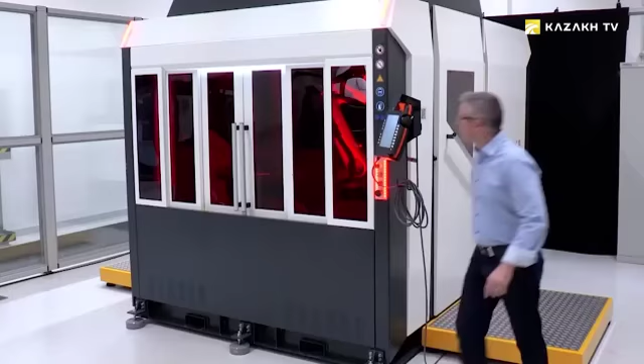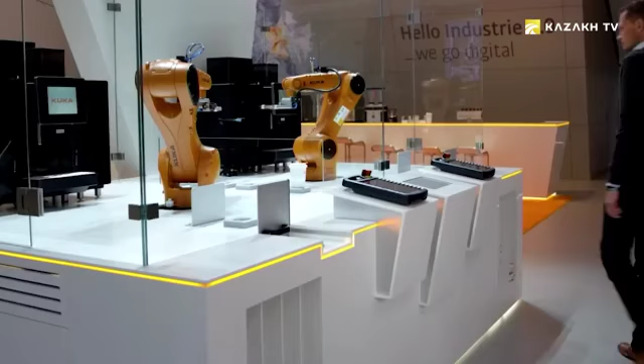The term Industry 4.0 came into common use in Kazakhstan in 2017 when the head of state announced the need to digitize industry. Automation of production is an inevitable process at each industrial enterprise.

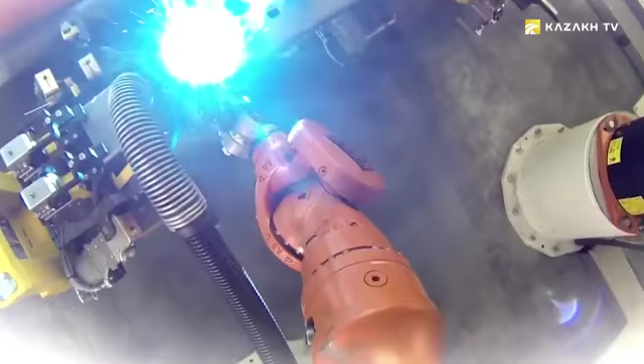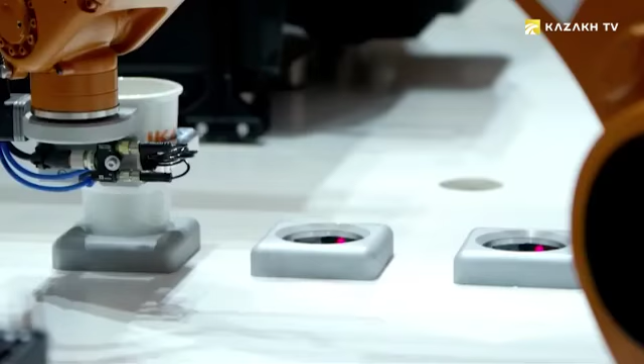Eventually, they come to the realization that harmful, heavy, or simply complicated manual labor can be replaced by artificial intelligence. The basic principle of Industry 4.0 is the symbiosis of machines and humans, the use of cyber-physical systems in production. For this, the algorithms of neural networks are used, which appeared in the 1980s but could not be used as effectively as now due to insufficient computing power.

What is a neural network? It is a trained algorithm based on historical data. When we add to this the knowledge of a person, an expert on the process, we get a management accuracy of about 95%. This is data from an international consulting firm.

The accuracy of machines is 80% when managing a process. The accuracy of a person can be up to 70%. But a person also depends on experience, service record, and mood varies. Moreover, when you combine a person and a machine, you get 95% accuracy.

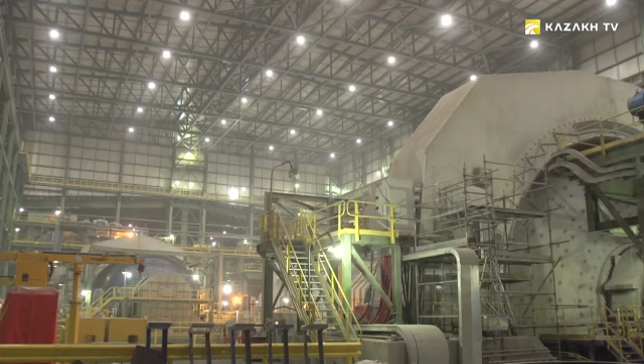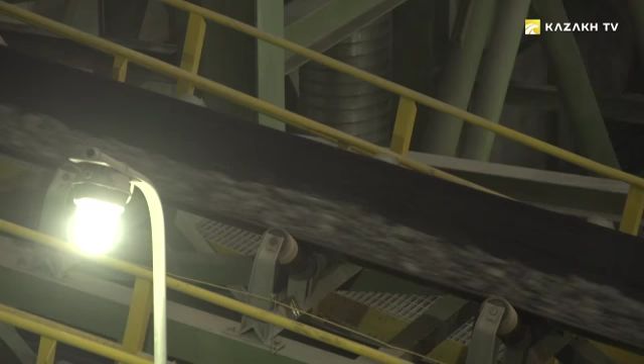Despite the efforts of the state and business to move away from the raw materials economy, the mining sector still remains the basis of Kazakhstan. These are companies competing on a global level with complex business processes. They existed on the territory of the country before independence. Nevertheless, it was these enterprises that turned out to be best prepared for the fourth industrial revolution and the introduction of digital control principles.

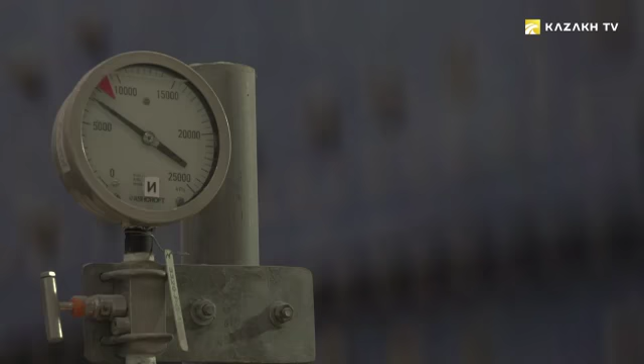It can be said that today mining enterprises are more ready for digitalization than, let's say, manufacturing enterprises. Today we already see that, for example, 6 of our systemic companies, ERG, ArcelorMittal, Kazzinc, Kazakhmys, and others are already implementing 14 projects until 2025. And we expect that these projects will provide an economic effect of about 240 billion tenge to gross value added.

It was necessary to begin the work on digitalization of industry with a collection of information and analysis of the current situation. Therefore, representatives of the Kazakh Institute for the Development of Industry, together with the German Fraunhofer Institute, studied more than 600 Kazakh enterprises.

The results of this work showed that more than half of mining companies are at the level of semi-automated production. Seven of them became model factories where smart mines are now created using geolocation and other digital solutions.

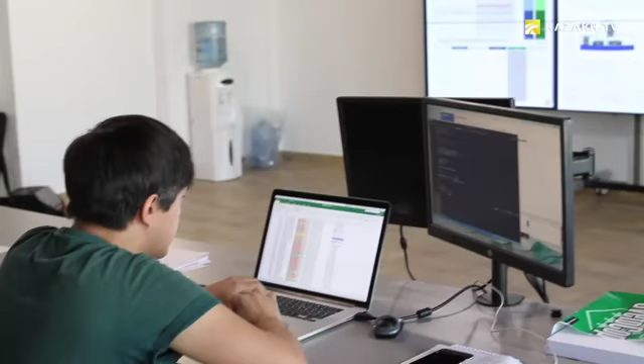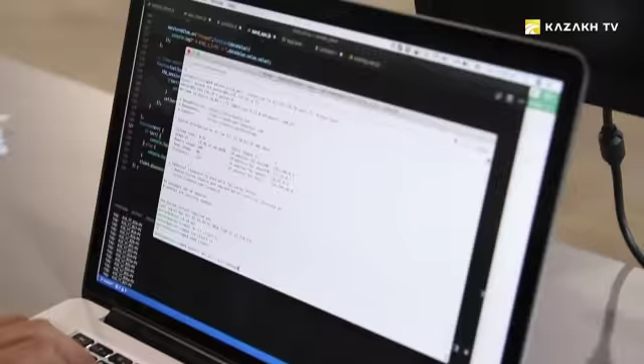One of these domestic developers is the Technology Development Center, created on the basis of the Innovative Technology Park together with British colleagues. Here they are engaged in the creation and implementation of information technologies at the mining enterprises of Kazakhstan. Laboratory algorithms are based on artificial intelligence and machine learning.

Big data is collected directly from production, sensors, laboratory systems, and manual input, in order to first build a digital process model. This is a kind of digital equipment twin and digital model of how the process takes place. Based on this, we can predict further what will happen in the process.

Based on a forecast given by a neural network, for example, we can make recommendations to the operator in real time.

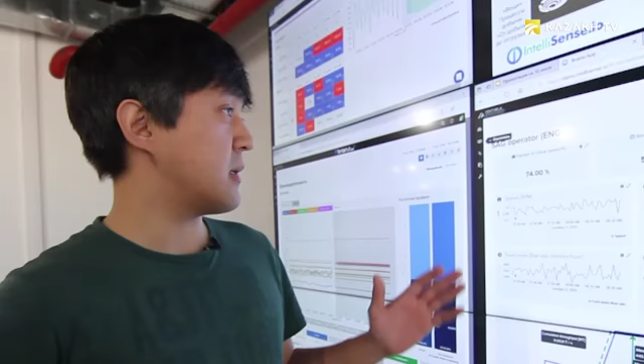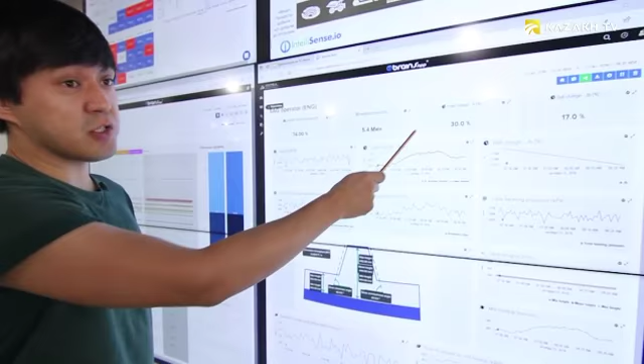Here is the operator's screen, which displays the main indicators of the crushing process: the time of material passage, and the percentage of balls loading. You can also see the red line on the lower screen, which is what we predict 10 minutes ahead, while the blue one shows the indicators which happen in reality.

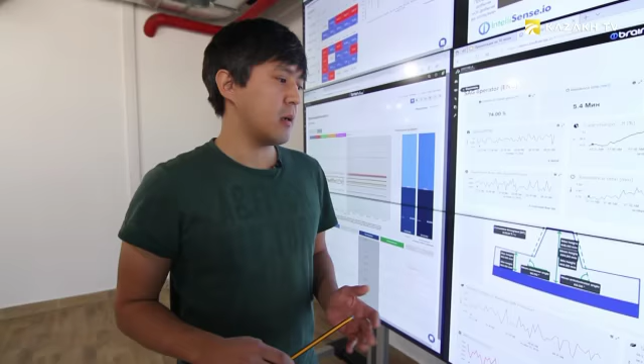We get real-time data from sensors, transfer it to the cloud, process it, and send the results back.

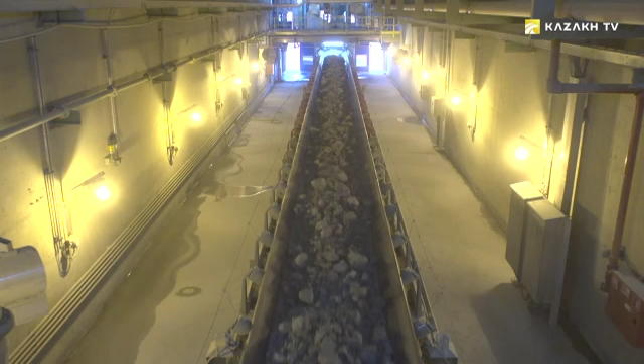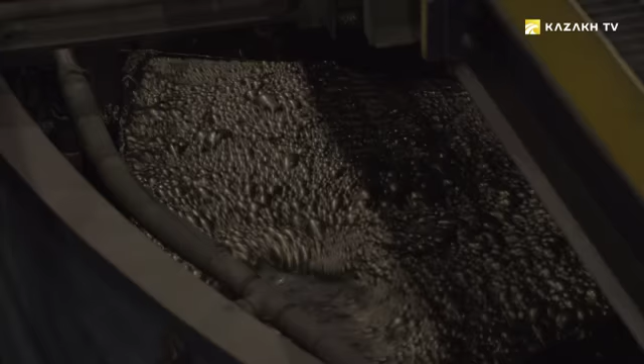The speed and efficiency of the introduction of such technologies depend on the level of technical equipment of the enterprise. The availability of the necessary sensors, IT infrastructure, or even communications and internet at the mines determines how quickly it will be possible to combine all the data and use them to improve production processes.

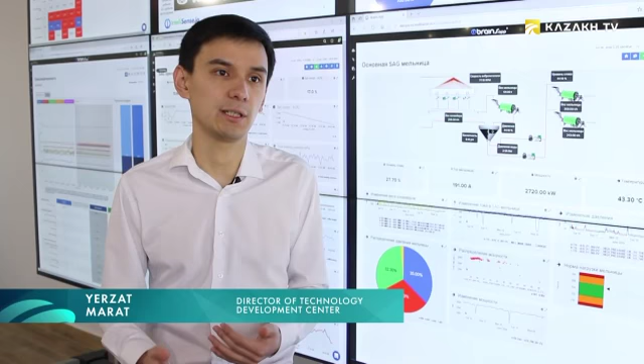With the help of many achievements in machine vision, many tasks can be solved in the context of safety. For example, occupational safety can be solved in cheaper ways than this could have been done before.

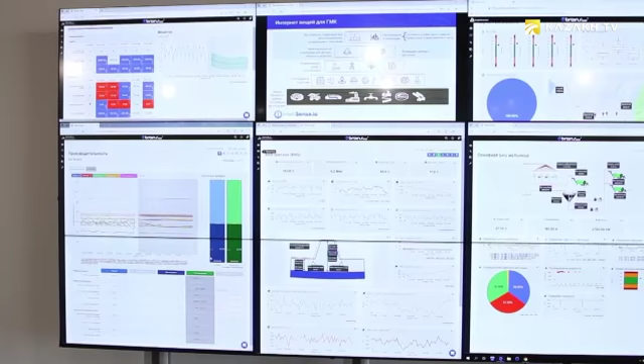These data are delivered from gold deposits in Zhambyl and Karaganda regions, where one of the largest Kazakh enterprises operates a mining site. Digital Mine pilot project was launched here in conjunction with government agencies. The gold mining giant uses cloud solutions for business process management, developed and supported by experts in Almaty.

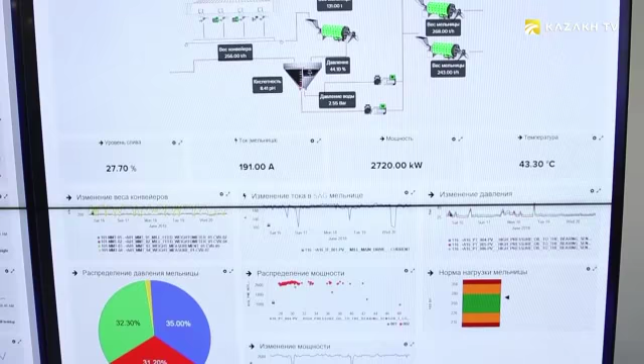According to the Digital Mine project, the system architecture is built today. There is an understanding of which vendors, systems, and for what purposes we will use throughout the entire cycle of business processes of the company, beginning with geology, open and underground mining, dispatch to the integration platform through which we will receive financial reports and financial data from the ERP system.

In addition, the plans of the Technology Development Center include the introduction of the Industry 4.0 platform in other industries, as well as the involvement of domestic developers to create startups based on the platform already created.

In Kazakhstan, 80% of GDP comes from engineering, energy, logistics, the mining and metallurgical complex, and oil and gas. Therefore, here is the platform that we use to optimize processes in the mining and metallurgical complex. We want to make it available for Kazakh developers and startups, and also for end customers in the industry, in order to get the effects of digitalization. Then everyone will be the winner.

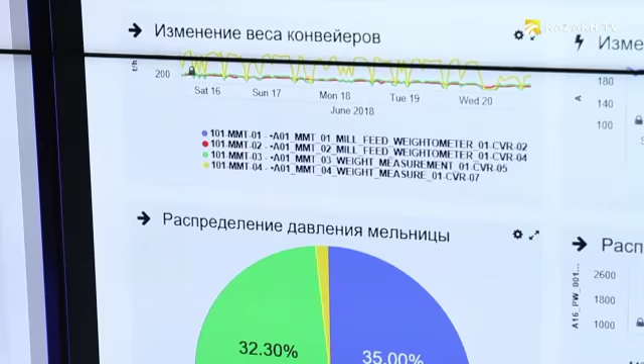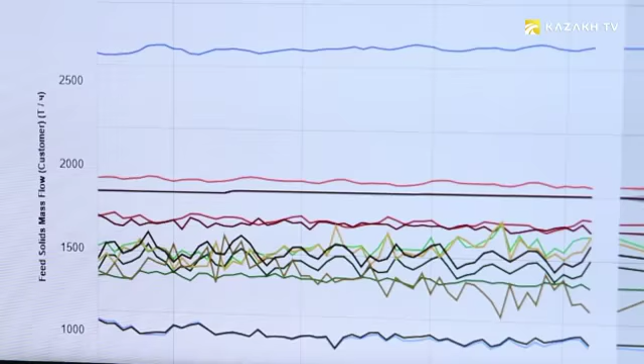IT specialists will receive new tasks, and enterprises will be able to quickly adopt the principles of innovative management. Artificial intelligence allows solving many problems using less expensive methods, so they are a profitable investment item.

Return on investment is good. For example, we try to optimize processes that give a return on investment during the year, that is, up to 12 months. If we're talking about a more comprehensive project, with the introduction of hardware and software, then the effects can stretch by 2-3 years there. But it also depends on the investor, the enterprise, the management of the enterprise, and what horizons they look at.

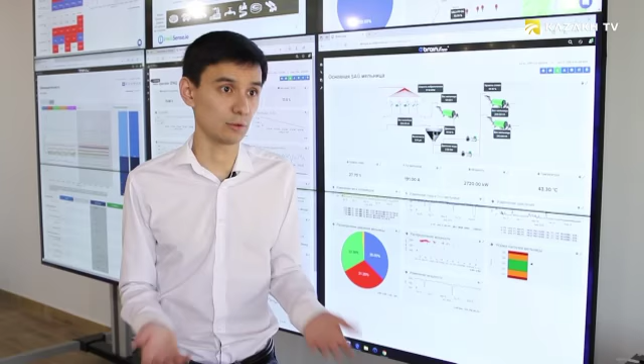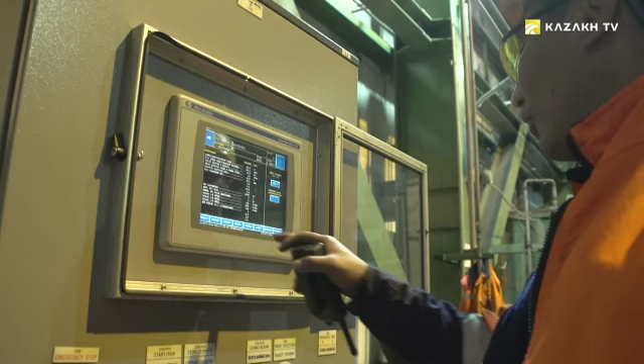One of the leaders in the introduction of digital technologies is a domestic enterprise of the mining and metallurgical complex. Here, all working processes, from ore mining to concentrate production, are automated to different extents.

I can tell you with confidence that the human factor is excluded here by almost 90%. If we go to the processing complex, we will not see almost anyone because all management takes place in the display console where the operator is working.

Up to 100,000 tons of ore is mined in this quarry per day. Each material must be classified and delivered according to its destination. For this, geolocation data are used.

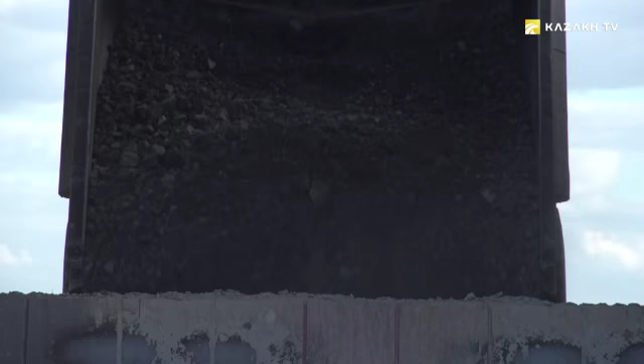Per day, 21 dump trucks make 1,800 travels. This is a very large amount. That is, earlier people had to record every travel, and there was no such system, so the human factor occurred and 1 to 2 percent went to the wrong destination. The number of incorrect travels could increase to 10,000 per year.

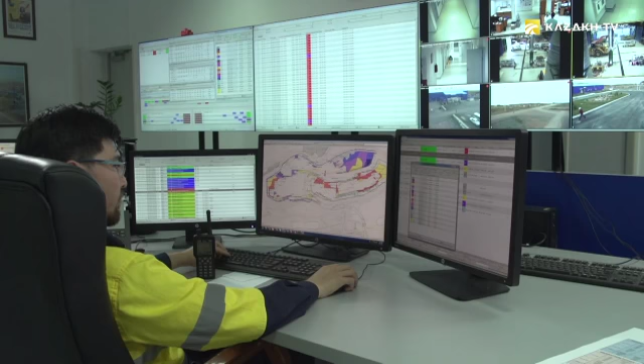Now we do not have such a problem because the Leica system automatically determines the type of material and its destination, whether it is some kind of ore stockpile, a sulfide, or a clay factory. This system includes not only ore classification but also the automation of the drilling and blasting schedule, and the distribution and route of mining equipment. Monitoring is also carried out at subsequent stages.

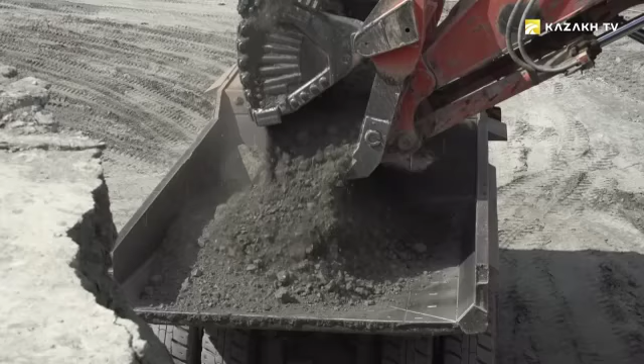Our main conveyor is completely equipped with belt drift sensors. Emergency cables and belt breaks are displayed here on my computer. I can see where the belt drift has occurred, or even if an emergency cable is pulled.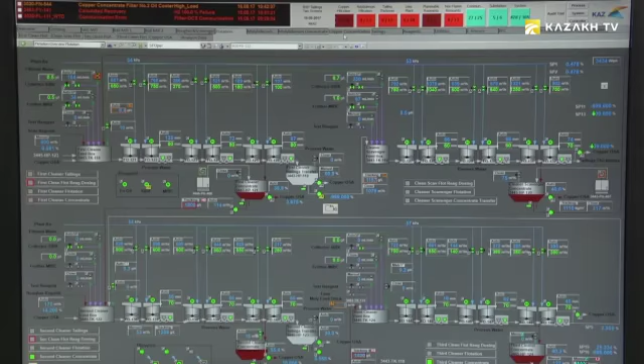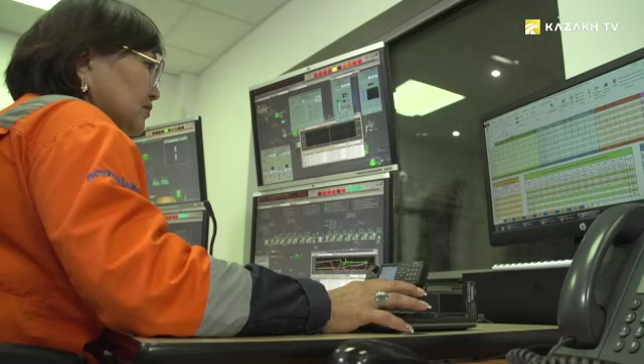The use of automatic control made it possible to increase the productivity of the quarry by 20%. All production processes are monitored from this room. It is the main control console where data from all sensors and information from all operators flow.

At the construction stage of our facility, over about 2 years, our management system was created by automation engineers, which you can see on the screens here. From here you can manage all the technological processes, starting from supplying the factory with water, which comes from Shidir village, about 100 kilometers from the factory - we can manage the pumps remotely - and ending with the final process, which is concentrate filtration of our final product.

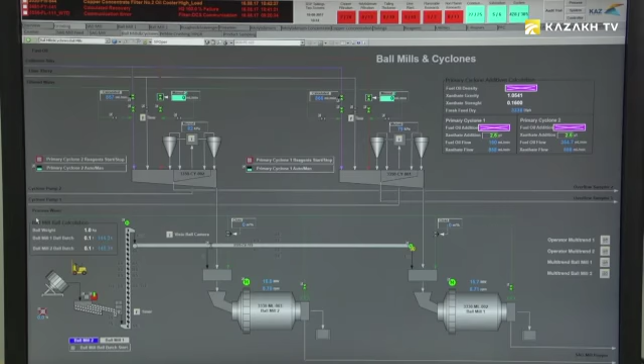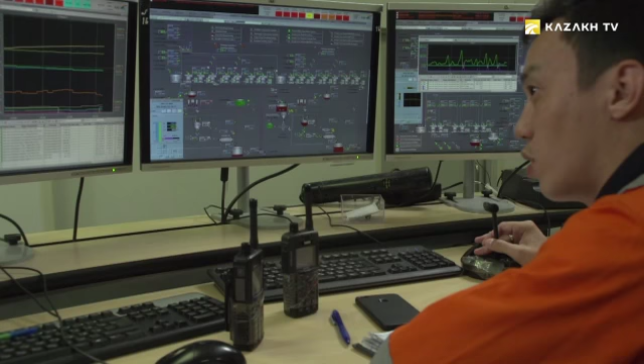Automated control systems cover a variety of manufacturing processes. Work is currently underway to introduce another digital tool for managing and storing data. A more advanced version of automatic control will allow maximizing the use of all information collected from the quarries and workshop premises.

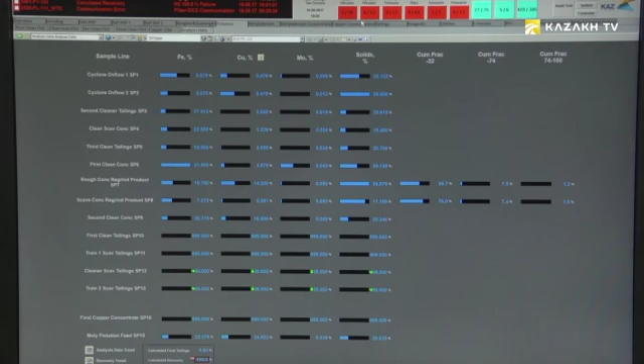For example, DCS stores data no more than 30 days - well, it depends on the information. PI Vision stores the data from the moment of installation, for as long as we exist here. It will store all necessary information, and it is convenient for cases when we need to establish the cause, for example, idle time or loss of processing. We can always use graphic charts far back in history that are not available in the DCS system.

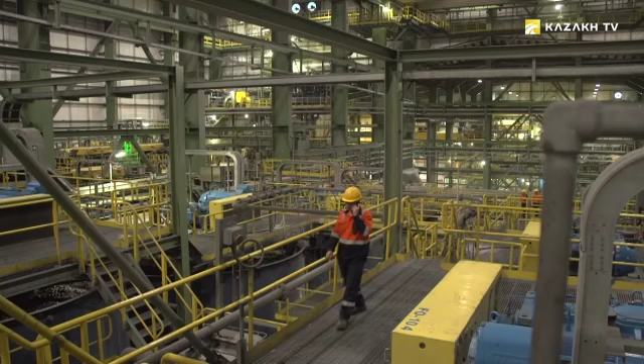In order to entrust such complex processes to machines, it is necessary to make sure that even in the event of unforeseen circumstances, the production will not stop and the information will not disappear. Therefore, much attention was paid to infrastructure during construction. All automation systems operate based on their own server, and for additional security, the data is copied into 2 storages.

We have optical lines of communication around the site, 5 fault-tolerant loops at each important node, where there are user computers or controllers, to which the factory equipment, transformers, and automatic valves controlled by operators are connected. There is IT infrastructure everywhere.

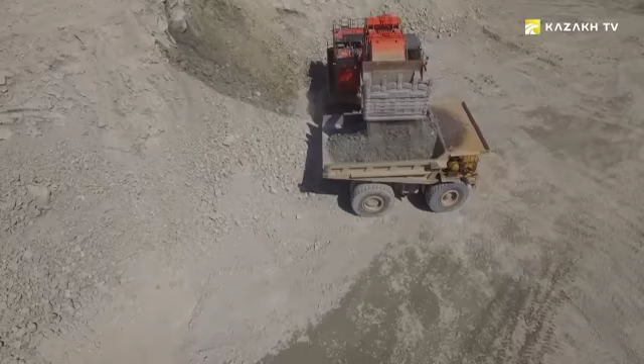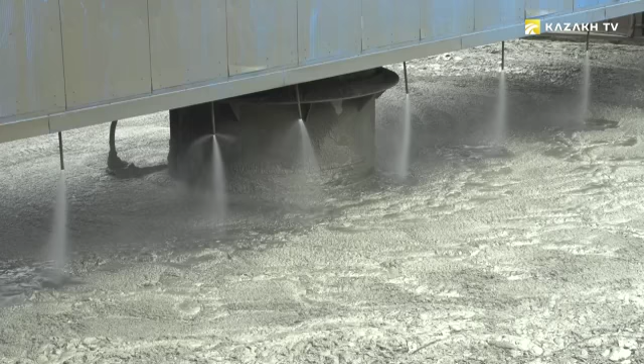Contrary to fears, using artificial intelligence and automating work processes will not affect the number of jobs, experts say. Only the methods of work will change from manual to machine. This means that representatives of working professions will have to acquire basic knowledge in IT, but even without these competencies, it is impossible to successfully implement automation in production. However, the efficiency of enterprises due to such technologies increases several times.

Digital solutions make it possible to increase the complexity of operations. In other words, to go deeper underground and significantly increase the economic efficiency of ore mining with a particularly low metal content. That is, all digital solutions increase the efficiency of our mining companies.

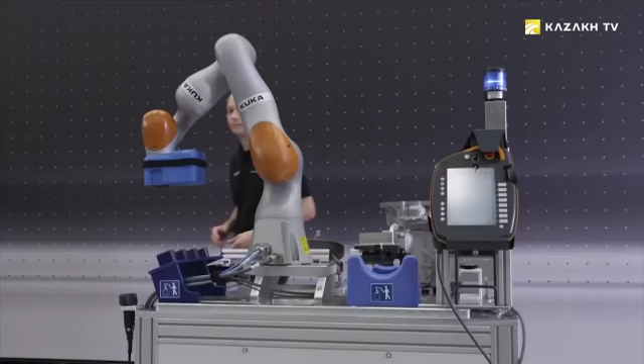All over the globe, digitalization of industry has been recognized as a global and inevitable process, the introduction of which is not a trend but a necessity. Solutions in the field of digital technologies are most attractive for the mining and metallurgical complex since they can be implemented at any stage of production.

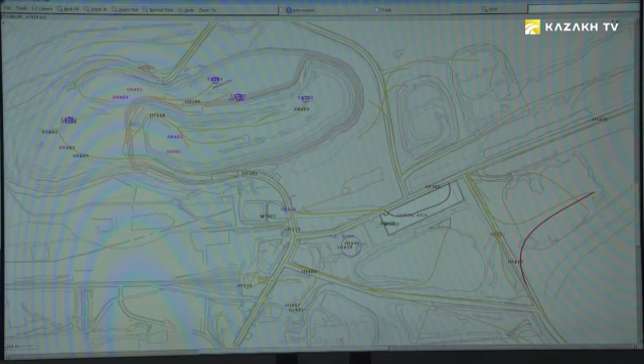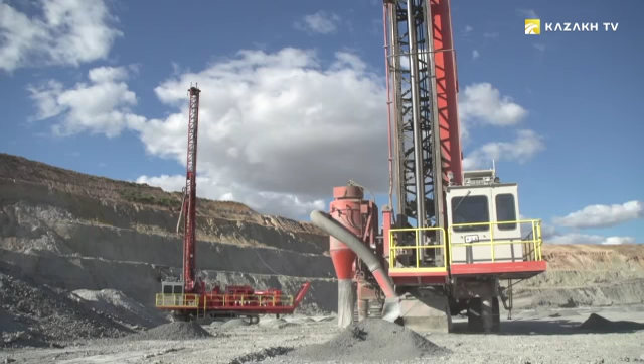The main thing is to train the staff to use these tools designed to ease their hard work and increase its efficiency. For example, thanks to automated processes, a smart quarry system will allow drilling machines to be positioned with an accuracy of up to 2 centimeters. This solution is planned to be used next year at Kachar quarry in Kostanay region.

Moreover, already in 2023, an innovative ore processing factory will start operating there.